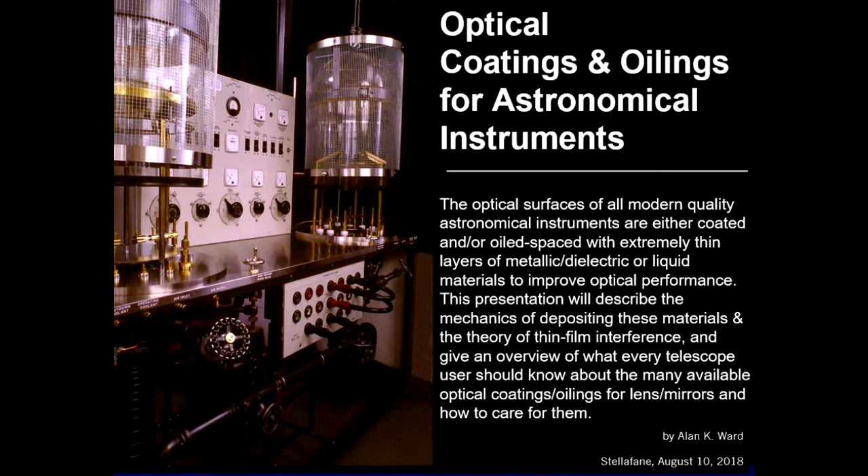Let's move on to our next speaker, who will be introduced by Steve Dodson, also known as Stargazer Steve. Our next speaker is Alan Ward. He'll talk to us about optical coatings and oilings for astronomical instruments. So go ahead, Steve. I'm speaking from Alan Ward's vacuum coating room in his backyard shop in Sudbury, Ontario.

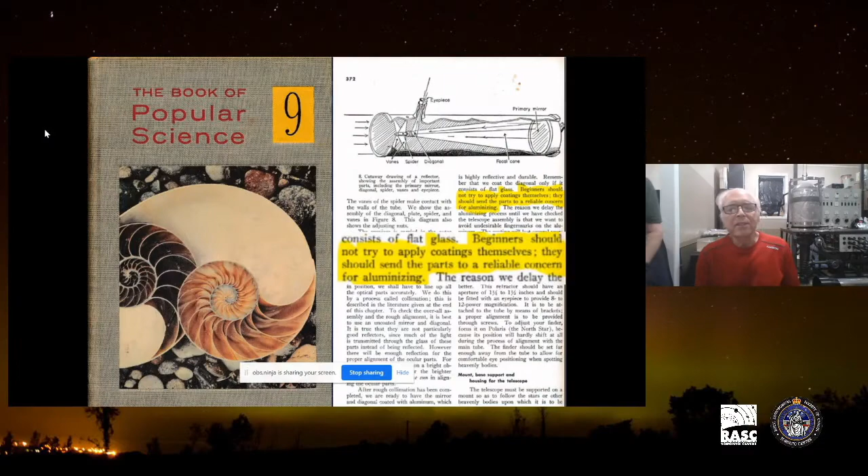And I have known and worked with Alan ever since he started his prolific telescope making career about 40 years ago. Several years before that, as a teen, he had become fascinated with the possibility of making your own telescope when he read an article about it in the Popular Science Encyclopedia. But one sentence that you can see in the yellow stopped him cold. You have to send your work away for the shiny aluminum coating.

Fortunately, that dream of telescopes came back into focus when he met Sudbury's telescope pioneer, Ken Odaisky. Ken had made a gaggle of scopes, many with mirrors he had silvered himself. With Ken's example, Alan quickly gained experience and became a telescope mentor to many at Science North. Of course, Alan soon realized you could skip the send away part of the mirror making by making a lens instead. So Alan's next telescope was a refractor. Now he makes world-class apochromatic refractors that have won many prizes at the world-famous Stellafane convention.

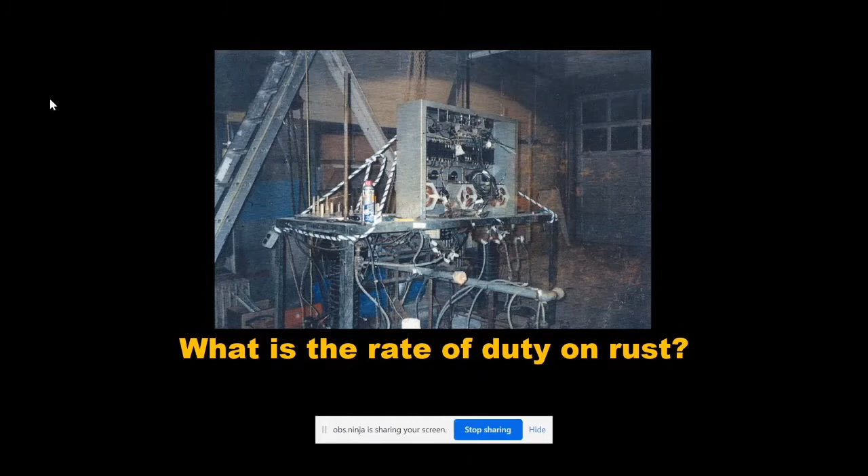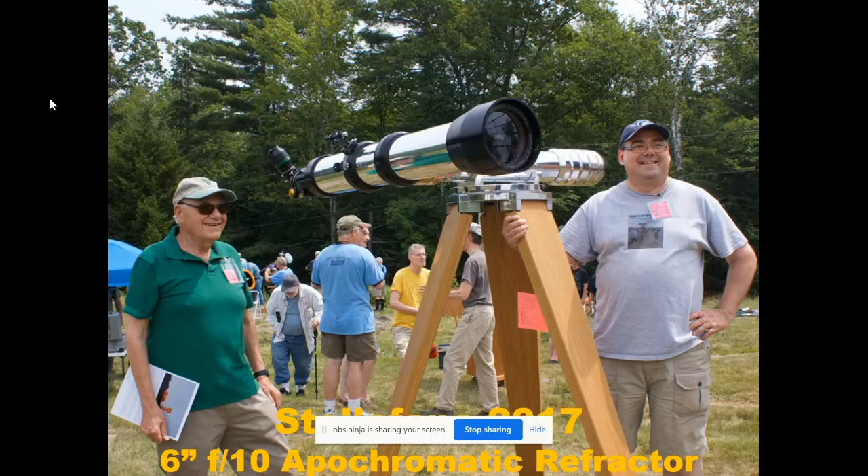But Alan was far from done with mirrors. The next bold step was to renovate several mirror coating plants and become an expert in their use. And some of you may have seen Alan at Starfest in 2003 when he successfully aluminized a telescope mirror in the field with his portable coating plant. More recently, he transported that equipment 1,000 kilometers to Stellafane in Vermont to provide the first ever aluminizing service there, coating 15 mirrors as a convention volunteer.

Some people will recognize the man on the right is Al Nagler of eyepiece fame. Few people know the theory and practice of what goes into and on astronomical optics like Alan. So I'll turn it over to him now.

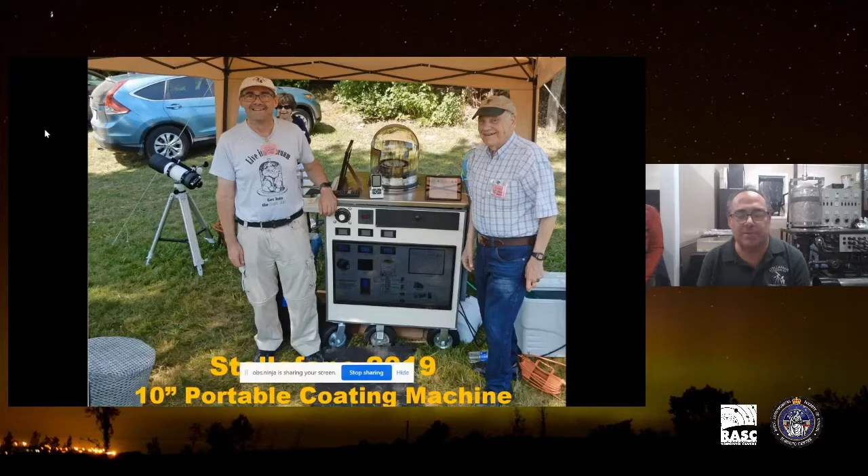Well, thank you very much for that, Steve. And I can't believe that 40 years has already gone by. And another thing too, this meeting marks my 25th anniversary for actually giving this talk. My first one on coatings was done at the University Star Party in 1996. So we're running short on time, so I'm going to go through this pretty quickly. And I'm sure you're all going to find this topic quite fascinating.

You all know the David Dunlap Observatory. During the 80s, when I knew Ken, we used to wrap up a bunch of mirrors from up north here and make the pilgrimage down south to Richmond Hill to have our mirrors coated. And I made this rack so that the DDO can coat several mirrors at once. So that was quite handy. I believe that rack is still being used today.

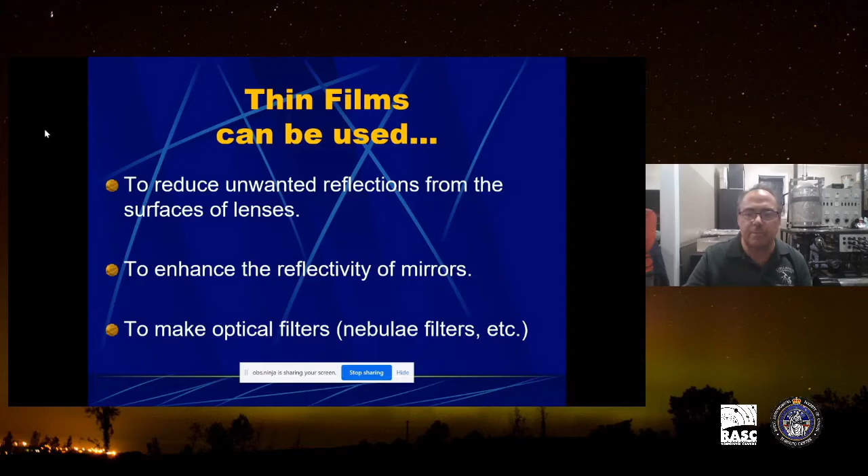So two parts to my talk. I'm going to explain to you how thin film coatings work, and also we're going to go over how they're applied to your optics and telescopes. As you know, thin films can be used for a variety of things for astronomy. We use them for reducing unwanted reflections from surfaces of lenses, like eyepieces, or lenses for telescopes. We use them also to enhance the reflectivity of mirrors. You've heard of enhanced coatings. And we also use thin films for making optical filters, like O3 filters, deep sky filters, that sort of thing. They all use pretty much the same kind of process, and they all work based on the same theories.

But I need to digress a little bit in order to explain how these coatings work, and to do that, I need to explain a little bit about how light works. The best way to do that is to use wave theory, using water as an analogy. As kids, we used to throw pebbles in the pond, and we see the wave pattern travel out in all directions in straight lines. But if you look closely at these ripples, the water has actually stayed put. It's the energy that has traveled from one spot to the other.

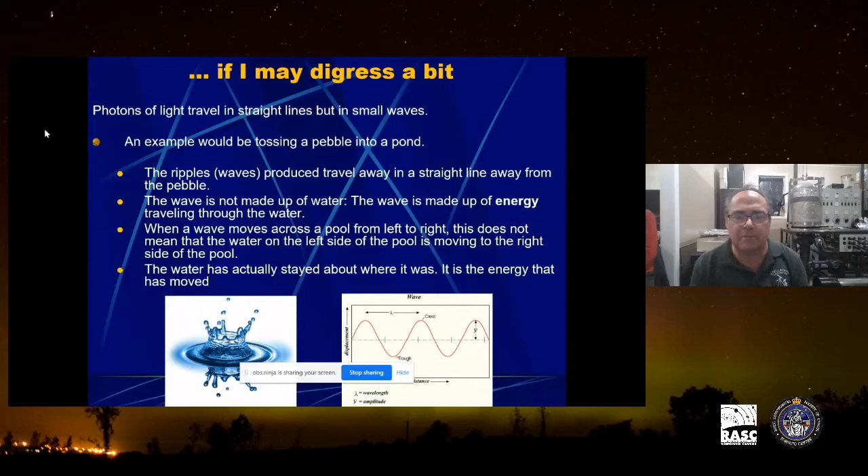So if you drop a pebble in a pool, for example, you'll see the wave travel from left to right. The water is not moving. It's the wave and the energy that's moving. If you put a toy boat in the pool, it'll basically just go up and down. So keep in mind that the water has stayed about where it is. It's the energy that has moved.

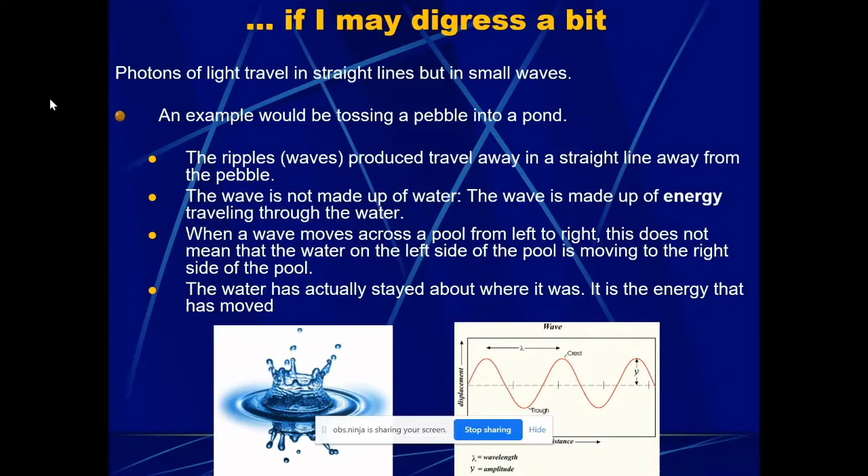We've all heard of tsunami waves. They can travel as fast as a jetliner, believe it or not, up to 500 miles per hour. But as they get closer to the shore, they slow down and grow in height, and that's where the damage is caused.

Now, marine architecture has actually used the theory of thin film coatings in order to reduce waves. And as you know, in an ocean liner, we have this huge bow wave that causes tremendous drag on a ship. These waves, like this bow wave, can be seen for hundreds of miles, and it produces tremendous drag. So we need to somehow reduce or eliminate this wave.

So how can this be done? Well, this is done by introducing a second wave. And this is done by introducing a protrusion that you can see in dry docks. It's called a bulbous bow. In dry docks, you can see this onion-looking thing sticking out in the front, but it's normally underwater. So that's why you only see it in dry dock.

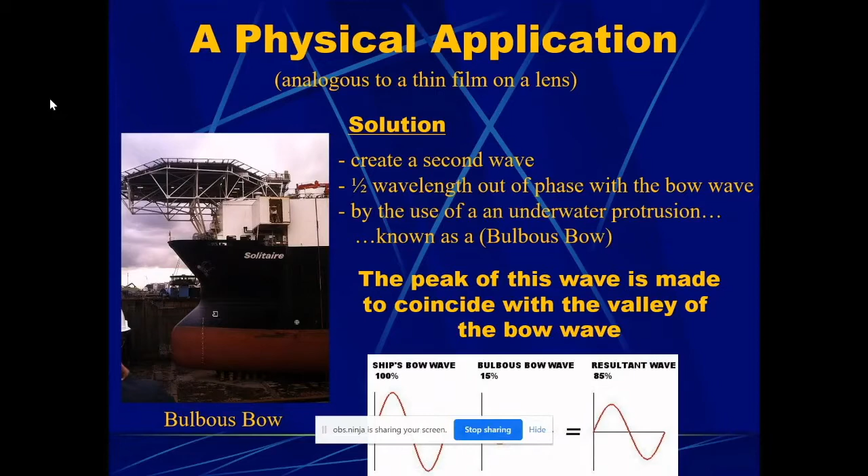But what this bulbous bow does is as the ship is traveling in the water, it actually creates a second wave, but this wave is slightly different. It's not as big; it's only maybe about 15% as big as the initial bow wave. But as you see by the diagram, it's out of phase. So these two waves basically add together and they subtract, resulting in a resultant wave that's only 85%. So basically, we can save almost 15% energy in fuel by doing this.

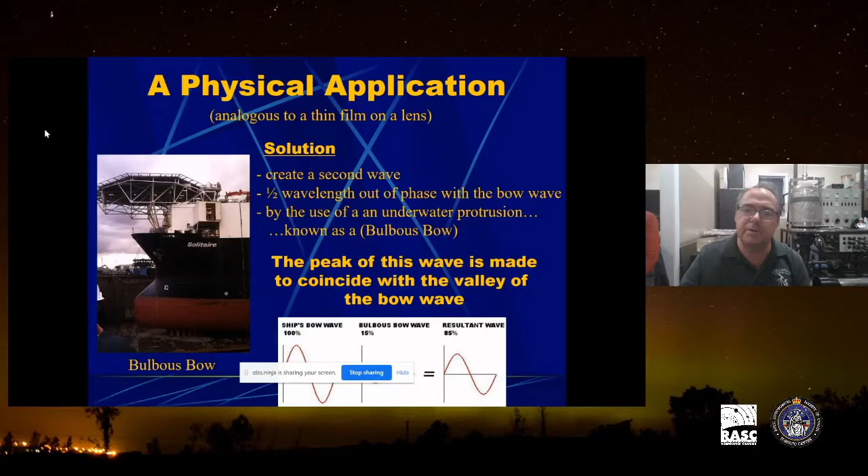I'll skip the skipping rope analogy. So congratulations, you now earned your degree in wave theoretical physics.

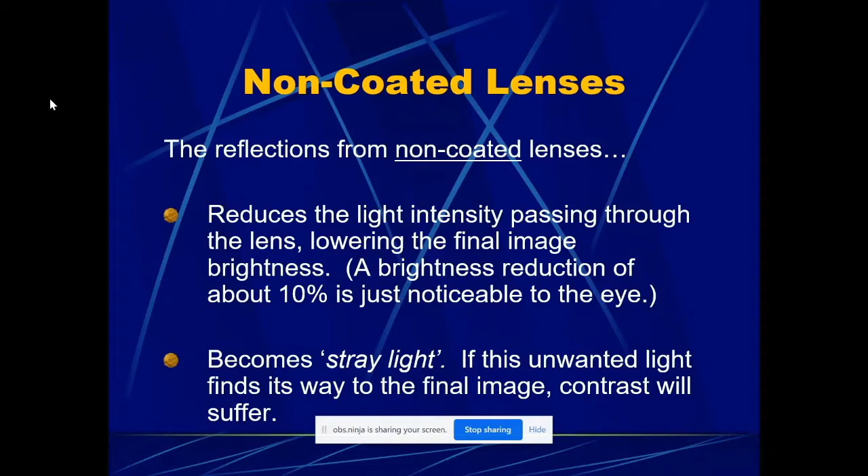Now let's observe what happens to light waves when they strike glass surfaces and other materials. With uncoated lenses, when you look at an uncoated lens, you see a lot of glare, a lot of that's because the light is being reflected from the glass on both sides of the lens. And if you have multiple lenses, it gets even worse, right? So this reduces the brightness at the final image. It also loses contrast. And the stray light is very, very unwanted. So we need to find a way of reducing these glares and increasing the light transmission through the lens.

How do we do this? Well, you'll see. Let's first show exactly what happens when light enters a single piece of glass. Here we have light coming in through the air and it strikes a glass surface. And of course, we see a reflection. Reflection is approximately about 4% on bare glass. And the rest of the light goes through. We're not going to take into account any absorption.

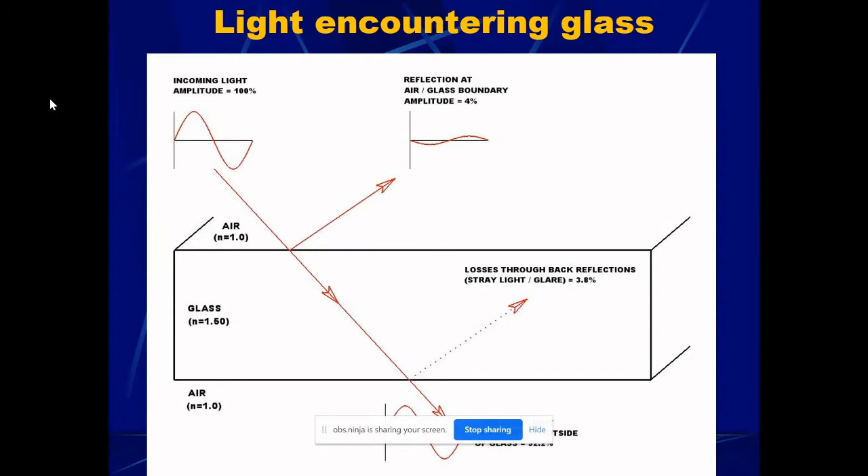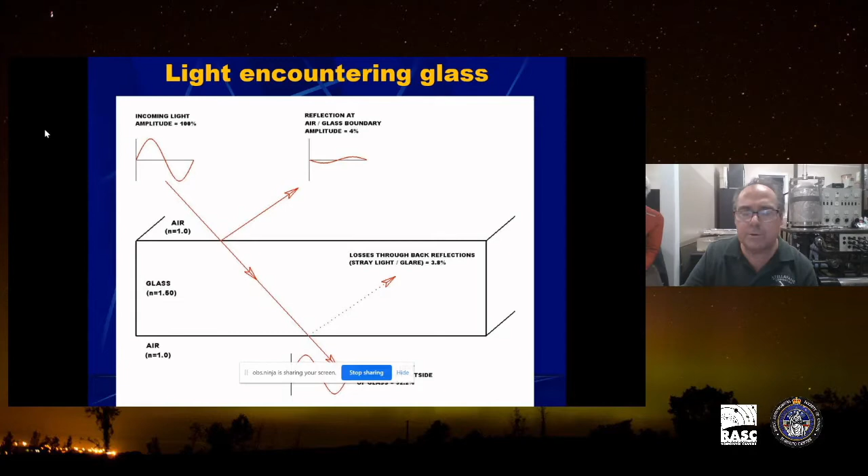We'll call it zero. And of course, we get the same reflection happening at the back end of the glass as it exits through. So by and large, we get a very low percentage of light going through the lens that's uncoated, around 92% or so. Not very good. And you can just imagine how much worse it gets if you put multiple lenses in there that are not coated. So how can we reduce these reflections? Well, what we do is we add a second wave, just like the bulbous bow did, and we use thin film coatings to do this.

One of the materials that's commonly used for lenses is magnesium fluoride. As you can see, it has a slightly lower refractive index than glass does, and that's important because whenever light strikes an index of refraction that's lower than glass, we create a smaller reflection. So as you can see here, the first reflection off the magnesium fluoride boundary is only about 2.5% compared to bare glass, which was 4%. The rest of the light goes through unabsorbed.

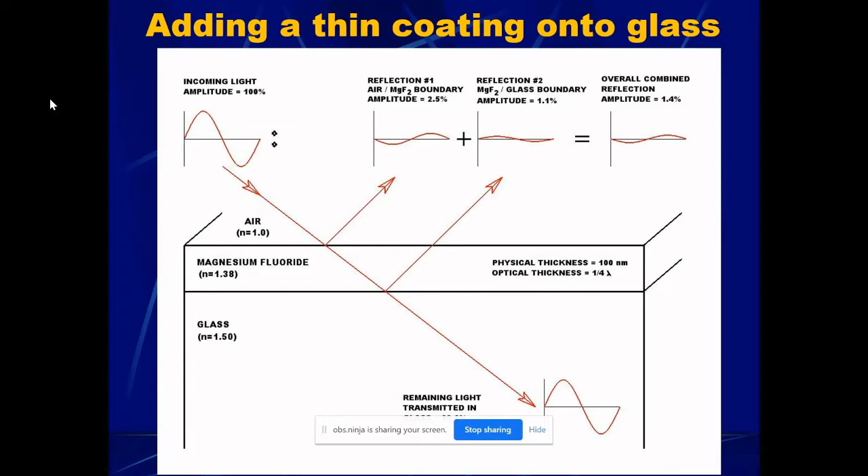But then again, the light going through the magnesium fluoride boundary now enters into glass, which is a higher index of refraction. So we get another reflection going on here. But as you can see, the light is traveling into the magnesium fluoride a quarter wave thick, and it's exiting out of the magnesium fluoride by another quarter wave. So now it's half a wave out of phase. And so we have two reflections that are out of phase with each other, similar to the bulbous bow.

When you add them together, you get a resultant reflection that's only 1.4%. So we went from 4% from bare glass to now 1.4% reflectivity by just introducing a simple thin film coating, such as magnesium fluoride. The same thing happens on the back side of the glass. We had the same coatings there, and of course we get a much better improvement in light transmissivity.

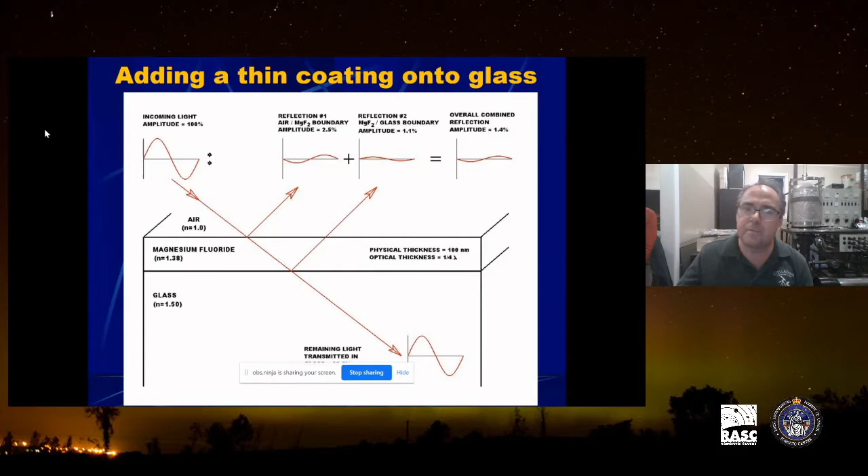Now, this doesn't work perfectly. In order to cancel out the light perfectly, all of these conditions have to be met, and of course they never are, because we can only have a quarter wavelength of a material for a certain color of light. So we basically optimize it for the middle of the spectrum around green or yellow, but then the reds and the blues, they're going to reflect more than the greens will.

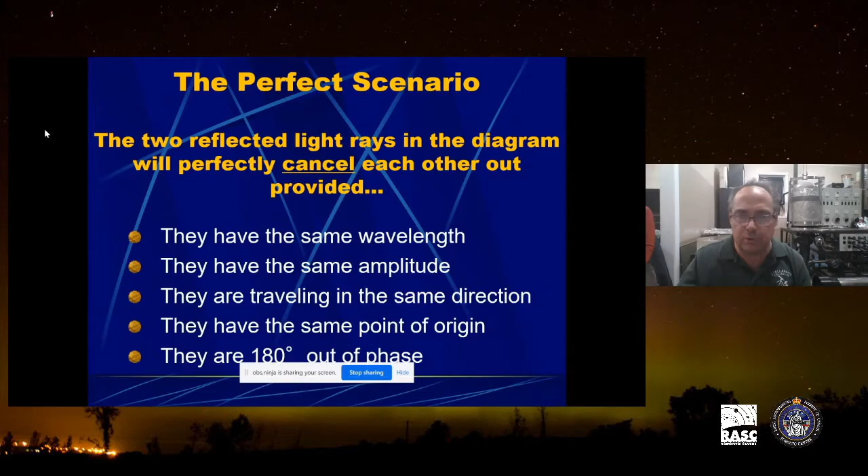So how do we improve that? Well, that gets a little bit more complicated. I won't get into it, but that's what multiple coatings are used for. But here's the effect that you would see. When you coat a lens, let's say just in the center part, we create the optical hole effect.

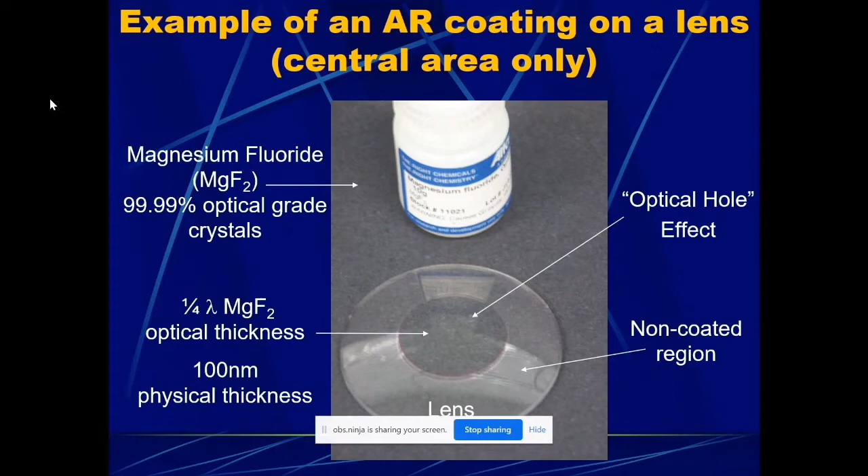And normally when I give this talk live, I pass around this lens, and no matter how you look at it through the light, you can't see any glass there. The only way to tell it's glass there is by touching it. Then you get fingerprints on it, and then everybody gets upset. But anyway, this is the effect that happens. The coating is very, very thin. It's about 100 nanometers in physical thickness. But that's all that's required to get this optical hole effect.

And here's another piece of picture frame glass that I used as a demonstration as well. As you can see, the glare off the uncoated section is quite prevalent, but the center part is coated. Now this is just with a single layer anti-reflective coating of magnesium fluoride. So multiple coatings involve many, many layers. If we wear eyeglasses or lenses for cameras, they can have 5 or even more different coatings on them, and they tend to straddle the spectrum to make the glass almost invisible.

Now let's go look at how mirrors are done with thin films. Typically an aluminum coating is very, very thin. It's about 600 atoms thick, or 60 nanometers in this case. And the problem with aluminum is that in a vacuum, it reflects 90%, but as soon as you introduce it to air, it immediately oxidizes, and you get a 10 nanometer aluminum oxide layer that forms on it. We only get an 87% reflection off the aluminum. Not very good, especially if you have 2 or 3 reflections in your telescope. You would be down to 65% with 3 reflections. So we need to improve the reflectivity of the aluminum.

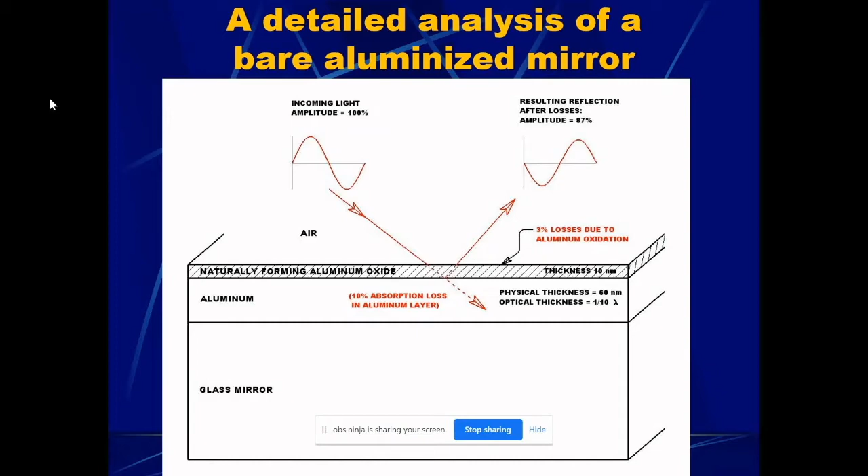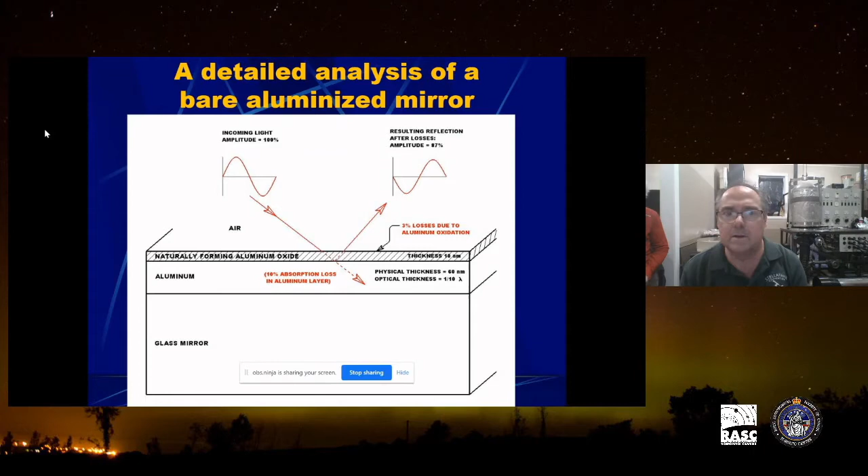Now, we used to use silver in the old days. Silver was 98, 99%, but the problem with silver is that it tarnishes. It reacts to the sulfur, and it causes silver sulfide to form, which is that ugly yellow appearance that you would see over the course of a year, especially if you lived in Sudbury.

So enhanced aluminum coatings, you've heard the term. All we're doing here is something similar to what we do with the lens. We're adding dielectric materials, but onto the aluminum. You've also heard of dielectric mirrors such as star diagonals, where there's no metallic base. There's typically about 40 layers of coatings, all done using dielectric materials. These are all transparent materials, and by adding them certain ways, you can create a mirror that's almost 99.9% reflectivity. The problem with these types of mirrors is that they're disposable. They cannot be stripped.

But enhanced mirror coatings can be stripped, and that's the beauty about them. And they can give you a lot more reflectivity as well compared to bare aluminum. And this is how we do it. We use magnesium fluoride as well and cerium dioxide, but we do the coatings opposite to the way you would in a lens. Let's go through what goes on.

So light's coming in, and it hits the cerium dioxide boundary first, which is very, very thin, quarter wave thick. And it's got a very high index of refraction, 2.3. So we're going to get a huge reflection right off the bat, 34% for the cerium oxide boundary. The rest of the light goes through, and it hits the magnesium fluoride boundary, and we get another reflection. This reflection is about 13.5%.

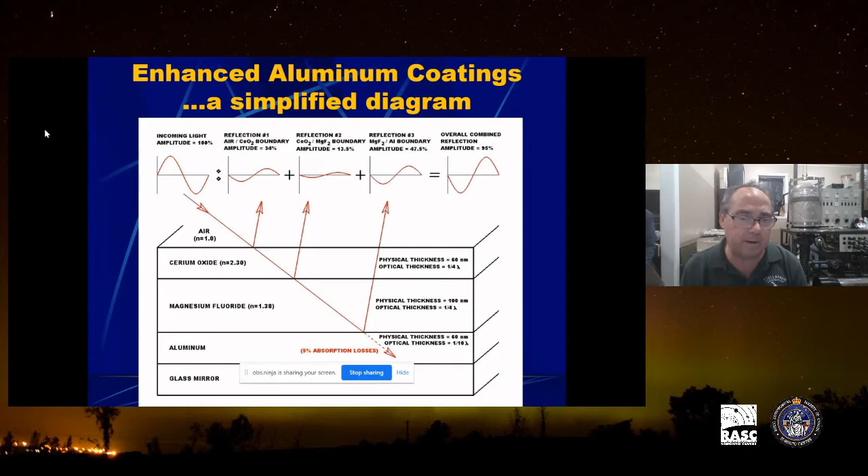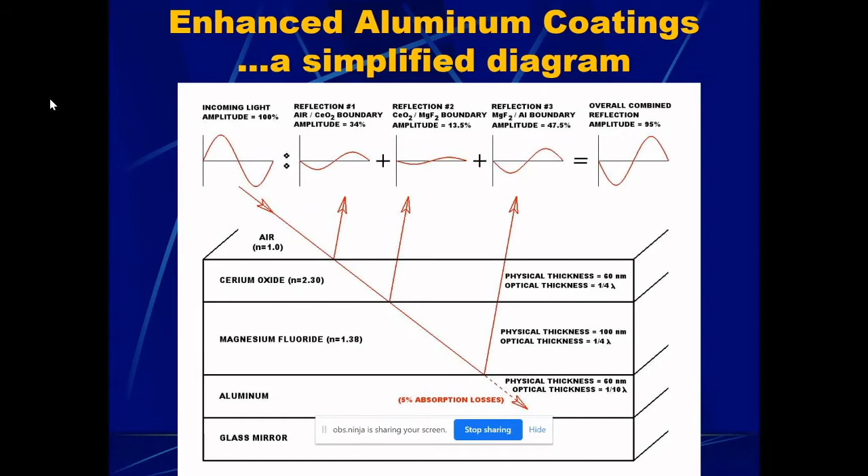The whole thing with the aluminum coating is that it wants 10% of energy, whatever hits it. So in this case, it's only absorbing 5% because 50% of the light or so has already been reflected by the dielectric coatings. Now this is just a very simple one; you can increase this again by adding another pair of cerium dioxide and magnesium fluoride, and that way you can get up to 99% as well. But it gets pretty tricky when you do that. And it's very, very hard to do these types of coatings on large surfaces as well.

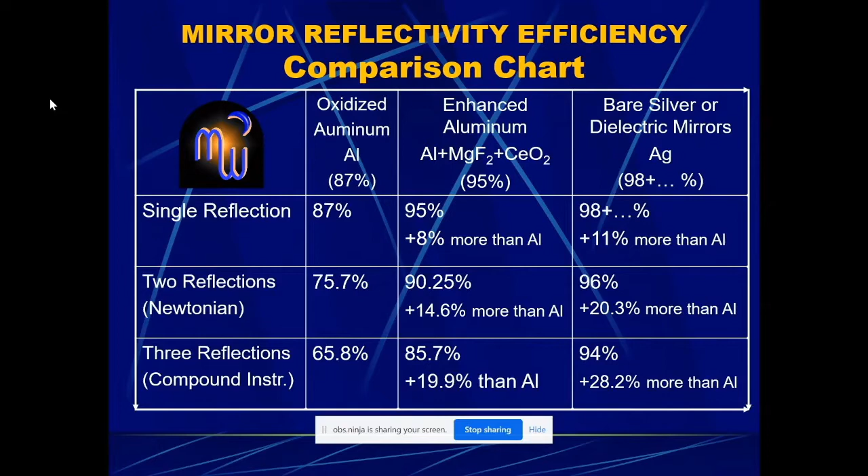So here's a chart giving you an idea as to the efficiencies of the different types of coatings and how many reflections you're dealing with. So as you can see in a Cassegrain, let's say we had 3 different reflections or so, you'd be down to 66% efficiency with bare aluminum. But with enhanced aluminum, we're up to 86%, which is a 20% improvement. And then if you had silver or a dielectric mirror, for example, you'd be up to 94%. So it gets pretty good. That's why it's a necessity that mirrors get enhanced aluminum.

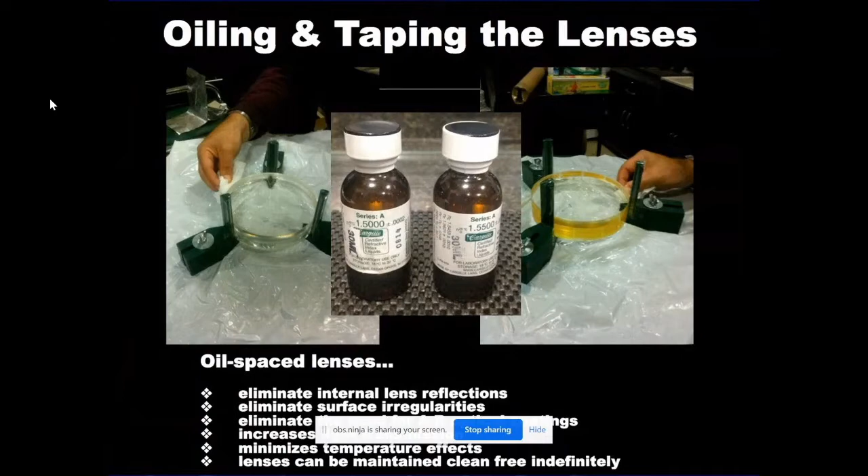Some of you have high-end refractors such as the apochromatics that use oils as well as coatings or a combination of the two. And this is how the oilings work. So for my apochromatic refractor, it's an oil spaced triplet. There's no airspace, but there's 3 different lenses. And what's nice about these oilings is that they eliminate a lot of problems. First of all, they eliminate all the internal lens reflections. They eliminate any irregularities, so the internal surfaces don't need to be figured. They just need to be more or less polished. It's not affected by temperatures, and these can be maintained clean indefinitely.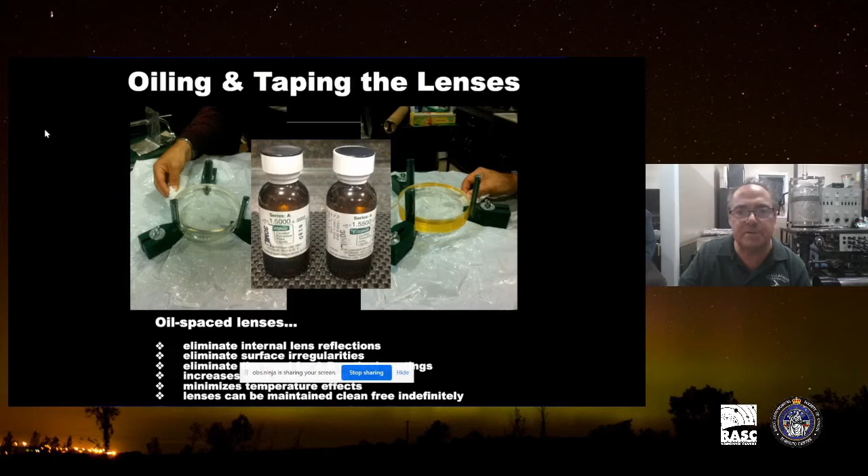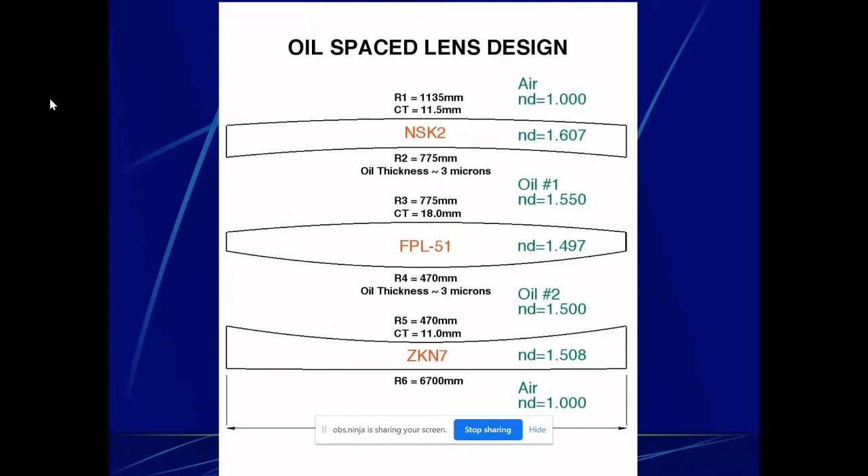Now, the thing is, the oil is pretty expensive. It's about $150 an ounce, but you don't need very much of it to do the task. So basically, the lenses look like this. There's 3 different types of glass. As you can see, they have different indexes of refraction. But what we want to do is choose an oil that's in between the adjacent lenses, so they best match. So we want this glass to disappear when we put this oil in. And that's what's nice about these oils. You can get them made to any refractive index you want, and that's why they charge the big bucks for them. So you can actually get away with just oiling these lenses and not have to do any coatings on them whatsoever.

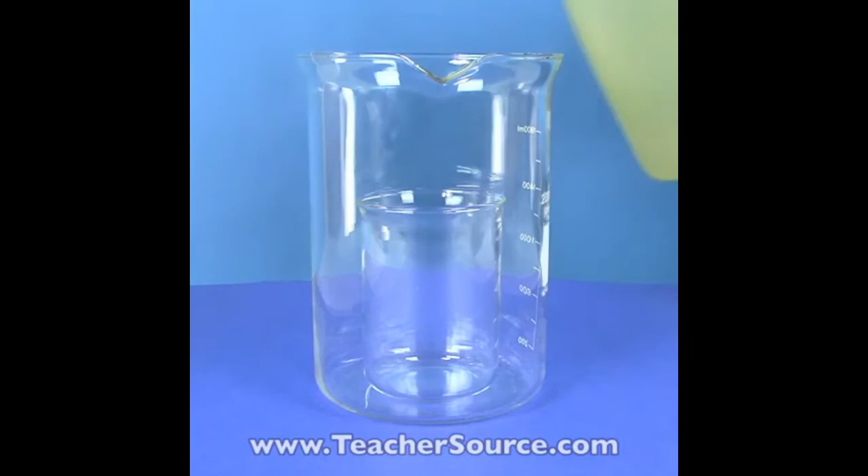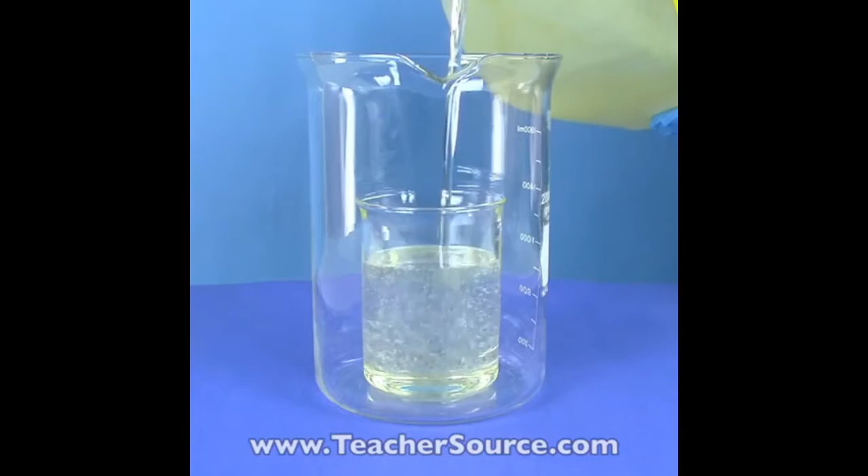So I'll get Andrew to show you the disappearing beaker video, and this basically exactly simulates what happens in an oil spaced lens when you use the oils instead of coatings. So Andrew, you're showing the video right now? Okay.

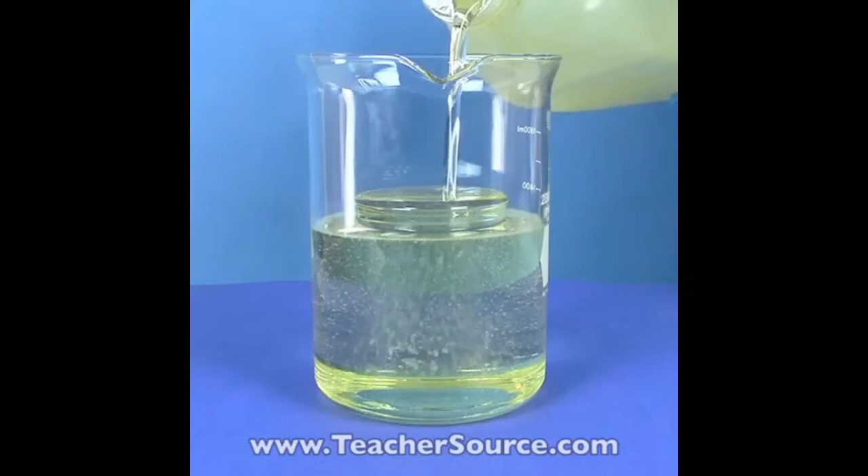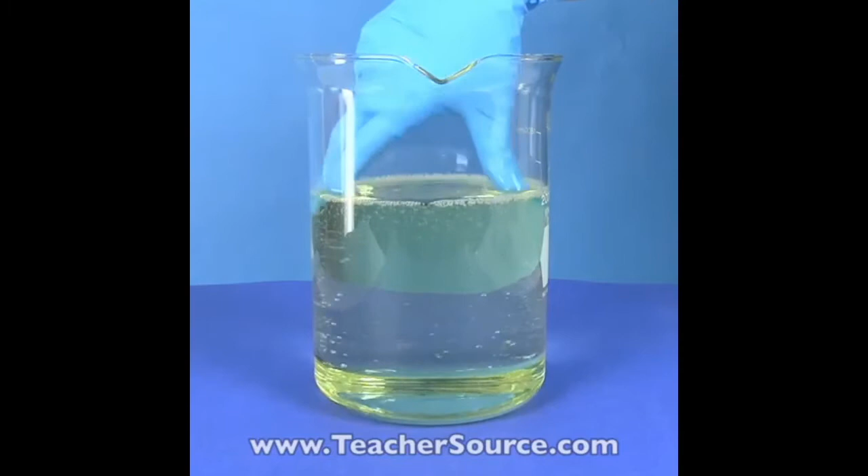Yeah, so the oil is basically filling in the small beaker within the bigger beaker. And as you can see, as it fills up and it displaces the air, the internal beaker more or less disappears. Now, normally I do this with a live demonstration where I pass it around so everybody can see. Okay, so that's pretty much the effect you're seeing here. Okay, now we'll go on.

I'm a collector of hot sauces as well.

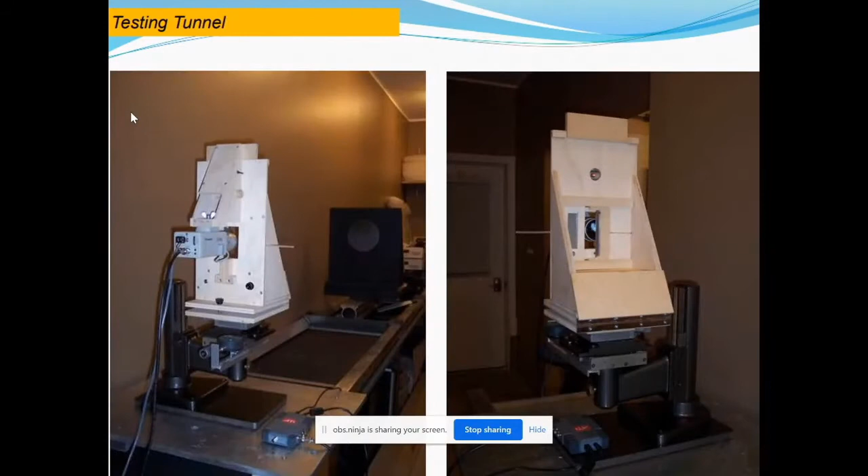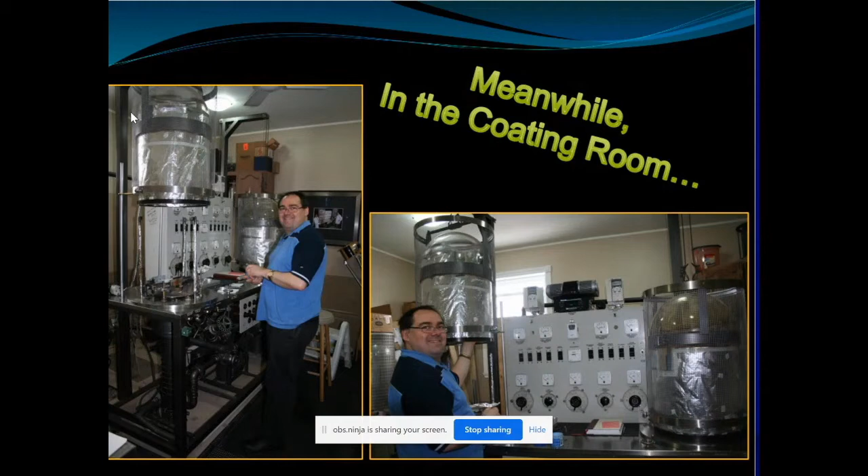The coating room's in the back. We have an optical testing tunnel that's all computerized. And inside the coating room, we have got a dual bell jar system. One of them is strictly for doing dielectrics and silvering, and the other chamber is used for enhanced aluminum coating. So this is a vacuum. Most of the technology that you see here has to do with creating a vacuum. So there's a lot of pumps and also electrodes.

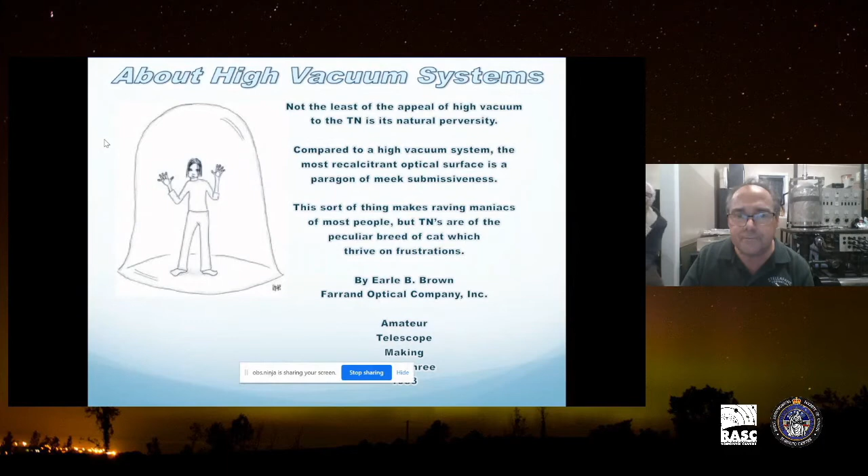So we use a tungsten filament for evaporating aluminum, and it basically looks like the same kind of filament that would be in an incandescent light bulb. What we do is we hang off pure aluminum crimps, about eight of these or so, 70 to 75 milligrams each. Everything's pre-weighed, so we get exactly the same coating thickness all the time. A lot of current goes through this filament, about 400 amps.

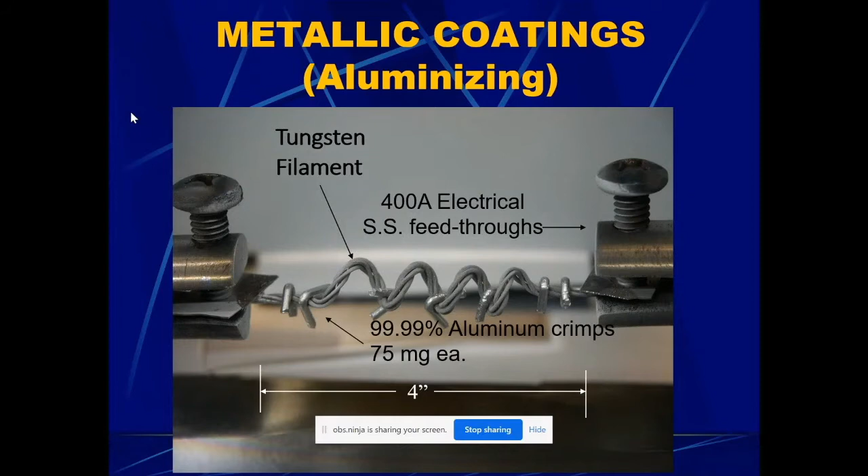The aluminum will melt at 600 degrees Celsius, and then it'll start getting hotter and hotter. At about 1200 degrees Celsius, it'll actually boil off because it's in a vacuum. So it'll turn into a vapor, and the vapor will go in all different directions. A very, very thin coating will deposit and condense on the glass substrate, no more than 600 atoms thick, which is about 1,000 times thinner than saran wrap. So it's a very, very thin coating.

You don't want to go too thick, otherwise the aluminum starts losing its luster and it'll look like a white piece of paper if the coatings are too thick. And if the coatings are too thin, then you can see light through them. So there's a happy balance there. Basically, we put a coating of 60 nanometers or so on there, and that makes it nicely opaque.

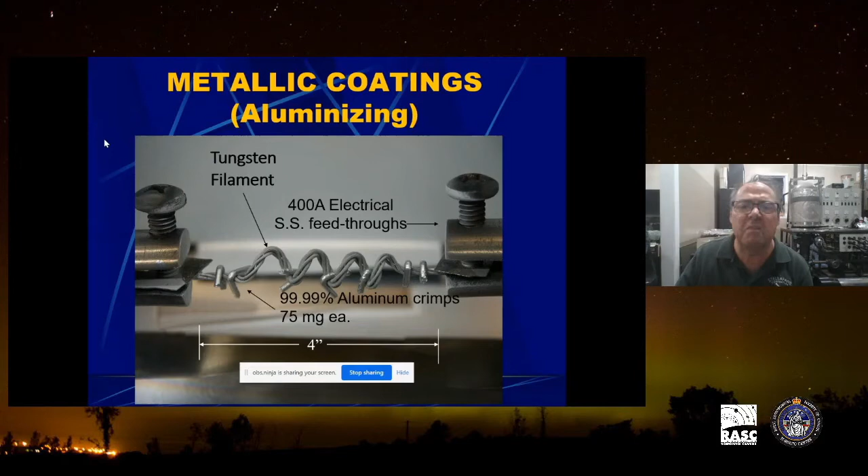Another example of the silicon monoxide boat. You can do silver in here as well. Silicon monoxide is sometimes used as a protective overcoat. I don't recommend it because silicon monoxide takes a long time to naturally oxidize in air, and it also reduces the reflectivity of aluminum even more than 87%. So the enhanced coatings are the way to go.

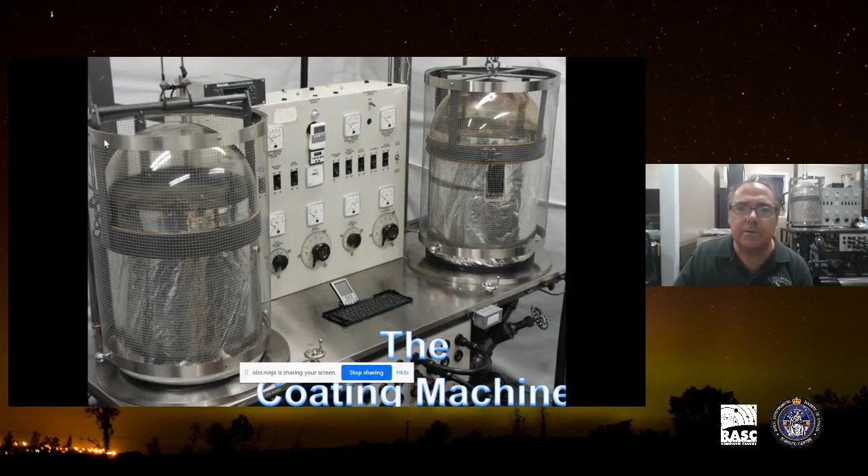So here's the chambers when they're pumping down. Most of the work is in taking the air out of the chamber. Most of it's actually water vapor.

Sometimes I like to get visitors. We've had the occasional celebrities drop by once in a while, like Alan Hale and Thomas Bopp here back in '97, and they signed my machine, and we spent an evening with them.

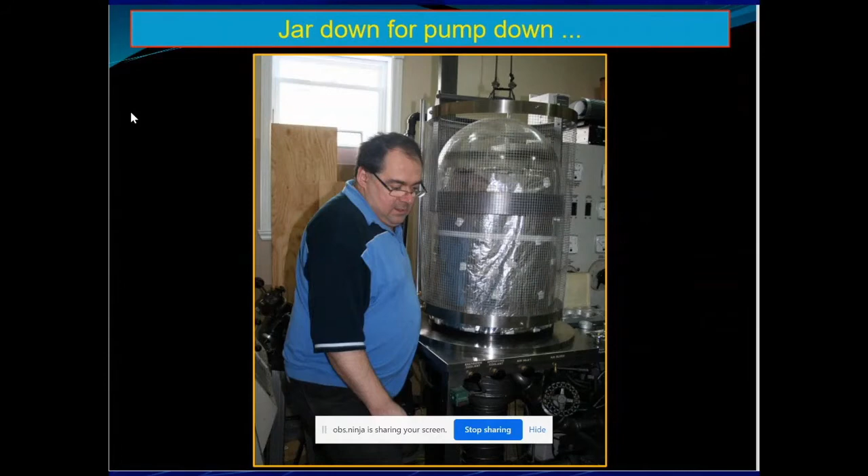So the mirrors, like I said, are suspended upside down. Here's a 16-inch mirror that we're putting in here, and you've got to be careful not to drop these things. And so we start the pump down. During the pump down, we do what we call molecular sandblasting, which is like an ion plasma discharge, where we apply 3,000 volts to the residual atmosphere.

What this does is bombard the surface of the glass with ions, so that it basically rips off any water molecules, because a lot of water likes to stick to things. It's like if you ever take a propane torch to a piece of glass, you'll see the moisture dissipate from it, and then you remove the torch, and you'll see the water reform right back on the glass. We've got to get rid of this water, otherwise the coatings won't stick very well to the substrate. So this plasma discharge is used for a good 20 minutes, and it rips off all those water molecules off the glass substrate, making it perfectly dry.

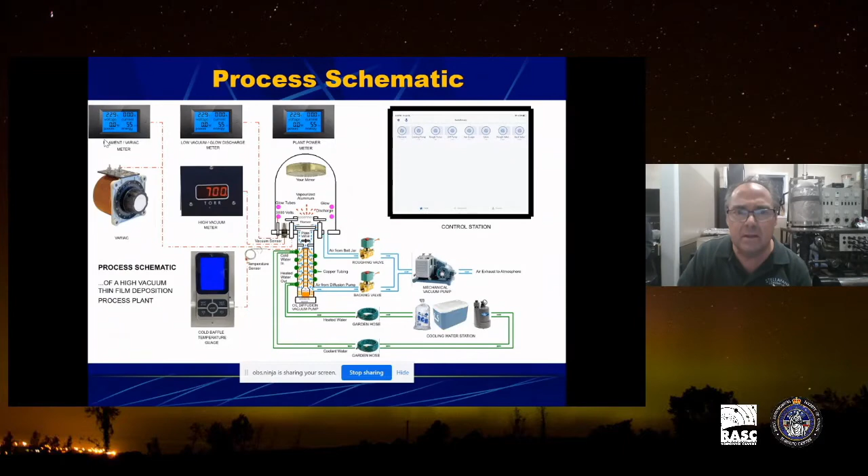Here's a process schematic of my little chamber, that portable coating machine. Basically, it uses the same process as my bigger machine. This portable unit needs cold water to run through it at all times in order to keep the diffusion pump hot at the bottom and very, very cold at the top. That's how the system works.

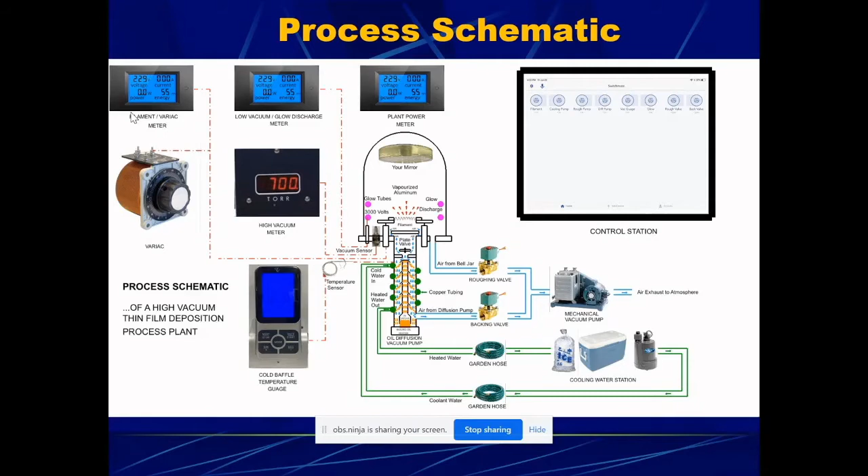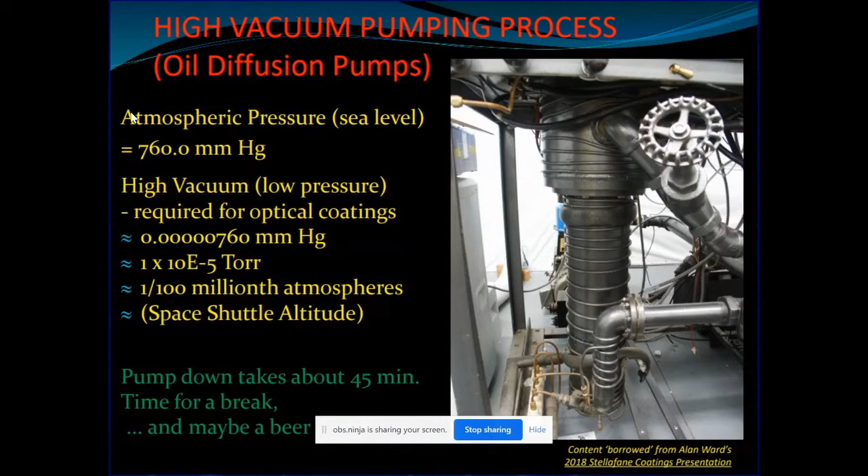This is the picture of a diffusion pump. The way it works is similar to the shower head in your shower. When you turn the water on, the water sprays out of the nozzles. Imagine having 7 layers of nozzle heads stacked on top of each other. This oil is being boiled down below, going up this chimney, and spraying out at supersonic speeds. So the oil is actually pushing down on the air, pushing it out, not sucking it out. And we need to get down to a very, very high vacuum, millionths of an atmosphere, similar to where the space shuttle flies.

Otherwise, when we vaporize the aluminum or other coatings, they'll oxidize in their travel to the substrate. So that's why we need to take out all the air as much as possible. So the pump down takes about 45 minutes to do. That's how long it takes.

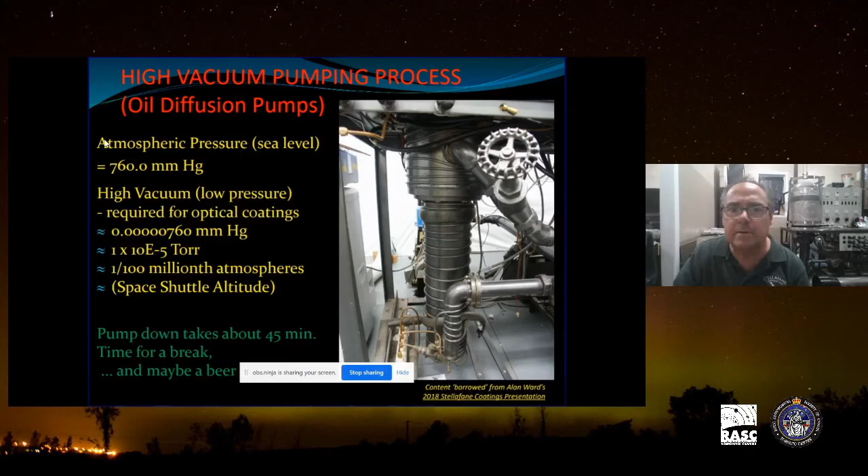But the actual coating actually takes very, very little time. It only takes maybe a couple of seconds for the aluminum to vaporize. It's done in a split second. The other coatings, like magnesium fluoride and cerium dioxide, may take up to several minutes to coat, and that's nice because you need to monitor the thickness as you're depositing those materials, in order to get the proper enhancement that you're looking for.

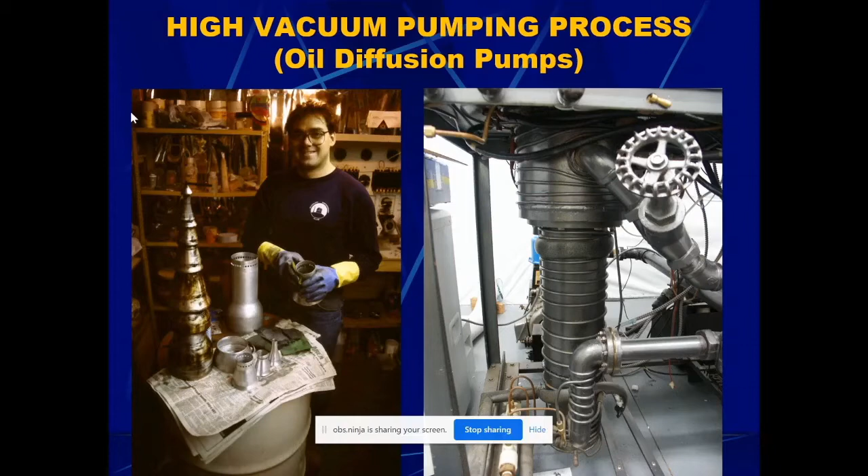So here's what's inside of a diffusion pump. These are the shower heads I was telling you about. This is when I was refurbishing this machine back in the early 90s. There's no moving parts to this pump, believe it or not. The oil basically boils at the bottom in a boiler, and the oil vaporizes and it rises up into this chimney, a stack of shower heads, and then there's little holes, as you can see there,

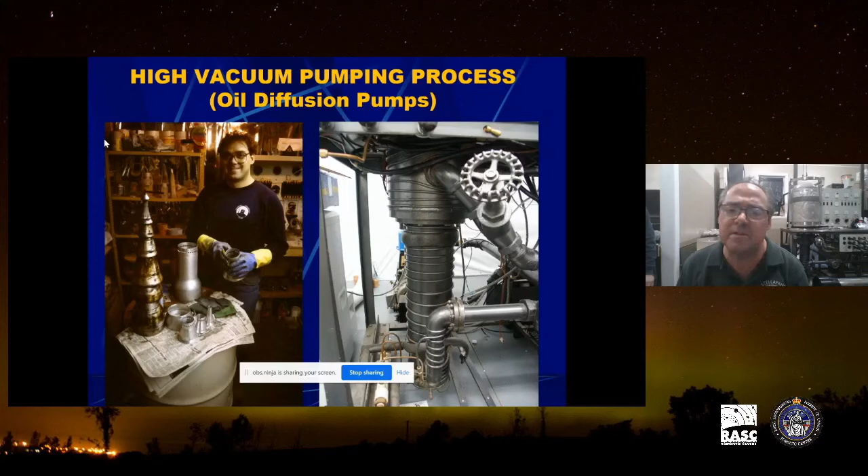and the vapor is so strong, so powerful that it sprays downwards, and then it gets cooled by those cooling coils that are around the pump. And the vapor now basically rains down, pushing the air out where it escapes out the side. There's another pipe just above the oil where it's boiled, and that's where the air is taken outside. So this is the mirror that's just being coated.

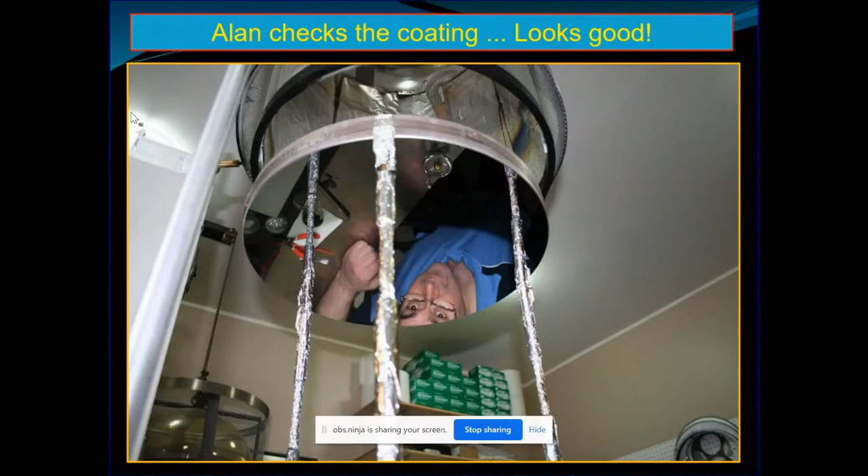Now, when you ever look at a mirror that's being coated, and if it has overcoatings on it, you'll see certain features on it. And these are interference colors that you will see. These coatings have to be baked at a very high temperature in order to be cured properly. So they're baked in air in an oven at about 250 degrees Celsius in order for the coatings to cure.

And as they cure, you can see these interference colors, and you can only see these edge on, or kind of at an oblique angle. When you look at a mirror face on, you should not see these colors. It should be perfectly white. But on the angle, you'll see certain colors. You might see magenta, yellow, and green. And depending on the type of coating that you have, it'll give you different distinguishing colors.

So the color tells us how thick the coating is. That's how we know. That's how we can tell how thick the coating is.

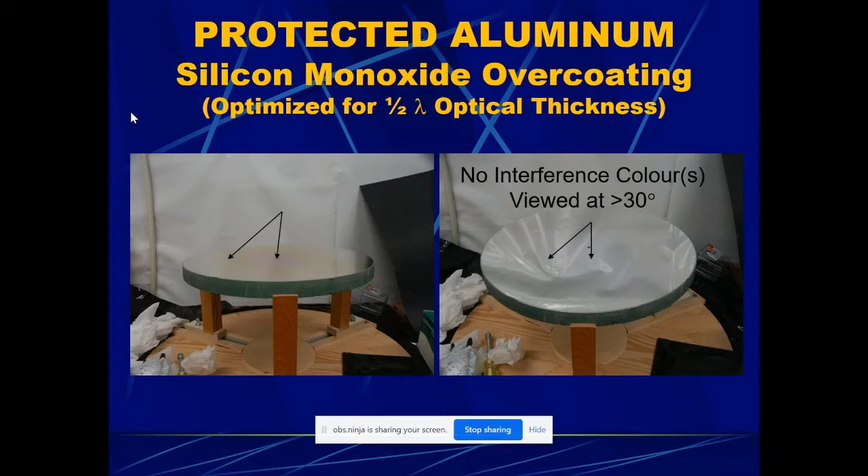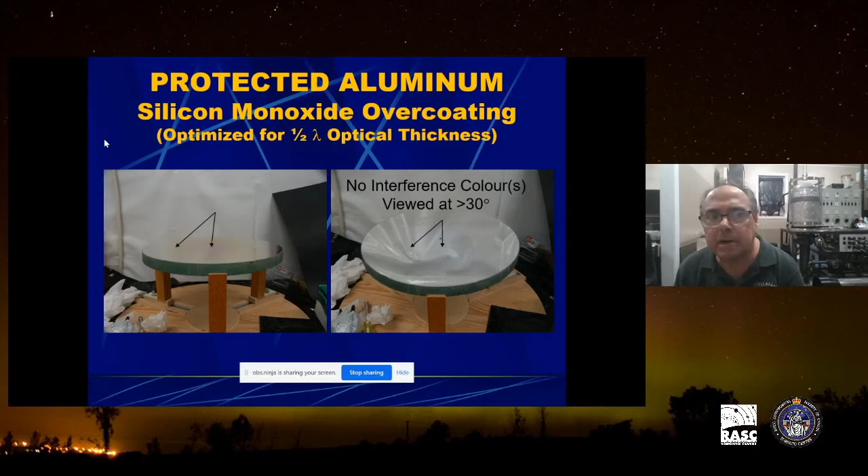So when we're putting on the magnesium fluoride, we'll see it go from a yellow to a magenta over a few minutes, and then we stop it around a magenta color, and then we introduce the cerium dioxide, and the cerium dioxide will then change the color from magenta to green, and then the green will slightly go away. And this is face on. But when you look at it on an angle, you'll see these interference colors.

And then with the latest Wi-Fi and Bluetooth technology, I made the coating basically all controlled through my iPhone or my iPad, and it was kind of fun for the spectators to actually operate the machine. All you had to do was push some screen buttons on my iPad to turn it on, and it would do its thing.